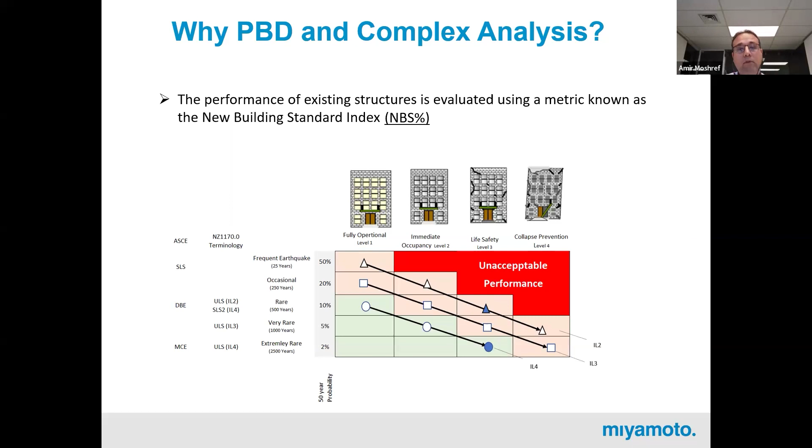The new building minimum code requirement in New Zealand is very similar to the US: life safety for DBE level, and to some extent collapse prevention for MCE level. So when we say a building is 100% NBS, it means we can satisfy life safety for DBE level. But what is unique in New Zealand is that we actually use NBS in advertising our structures, and the public is very familiar with NBS.

But there is a similarity between New Zealand and other locations like the US: when we want to change building use, we need to upgrade our existing structure. It's compulsory, and we need to upgrade it as closely as practical to 100% NBS. In ASCE terminology, we need to satisfy the basic performance objective for new buildings, or come as close as possible. This is very important, especially after COVID, as most office buildings want to convert to residential, meaning we need to do strengthening on those buildings, and providing a cost-effective solution for strengthening is very important.

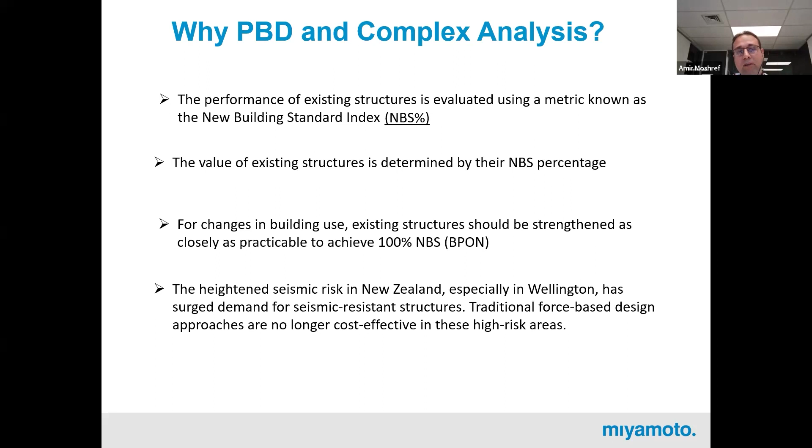But the other driver in the market is new design. If you're not aware, in New Zealand we recently reviewed our national seismic hazard, and as a result we found that the previous hazard level in some locations was very underestimated.

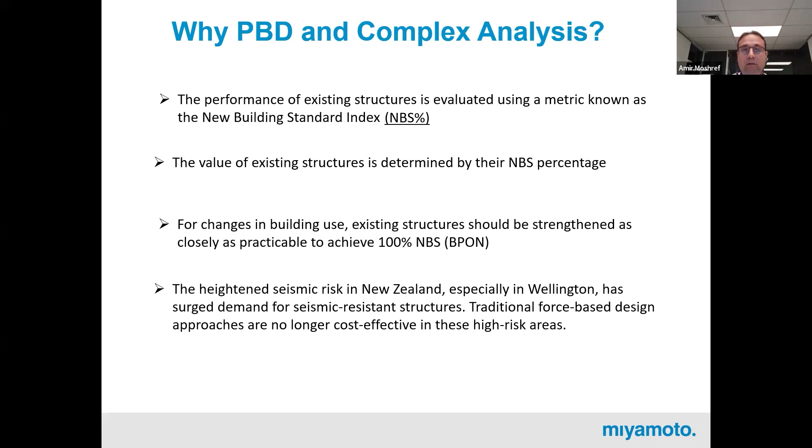That's the other driver in the market, because if you want to design a building based on the traditional method using shear wall or moment resisting frame for this high level demand, it's not economically viable. As a result, you either need to use technology like viscous damper, base isolation, or try to use performance-based design to understand what's actually happening in the building and try to optimize your design.

But do we actually have evidence for this kind of theory?

So we can see that, or we can easily correlate our revenue to promoting performance-based design into the market. What's happening here is essentially that you guys are providing something completely different from any other people in Wellington or anywhere. That's actually the whole key of this talk.

So with this kind of introduction, let's go to some case studies. The first building that I want to share with you is located in the center of Wellington. It was built in 1964-65. It's a 26-story building with a 68-meter height. This building has a 7-story podium, 16-story tower, and a 3-story penthouse on top.

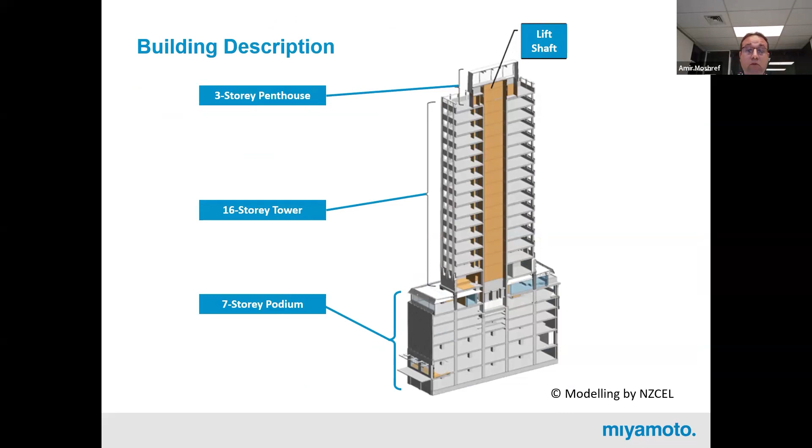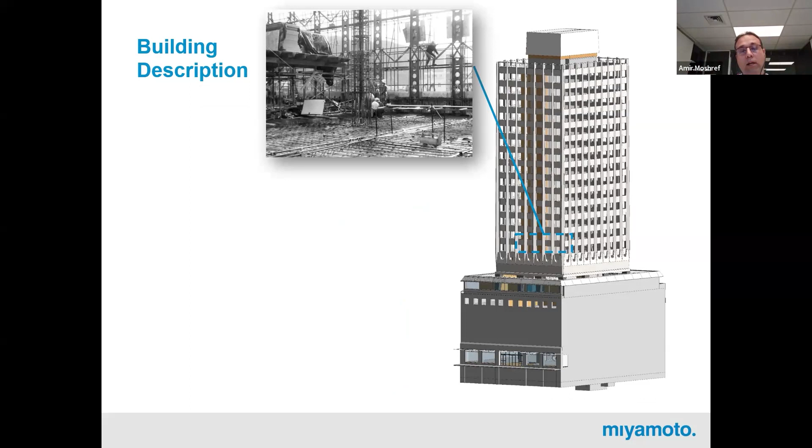But what is unique about this building is the structural type. The original designer actually designed the building using composite components, meaning concrete encased steel lattice structure, or concrete encased steel profile. In the tower, the lateral resisting system uses those kinds of small columns with beams, so it works like a tube system for the tower.

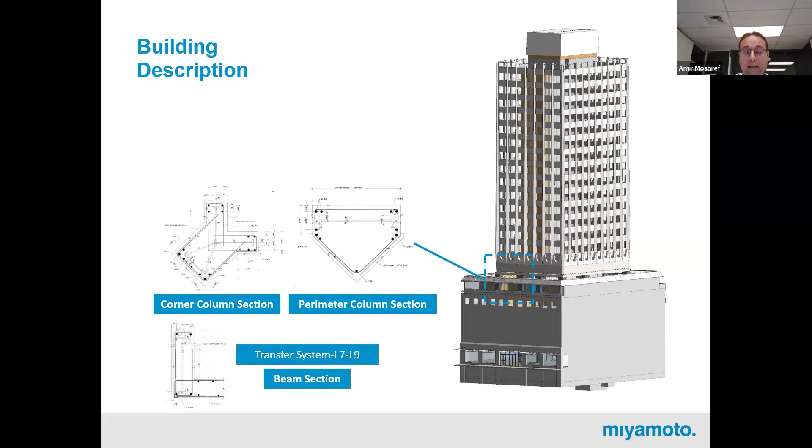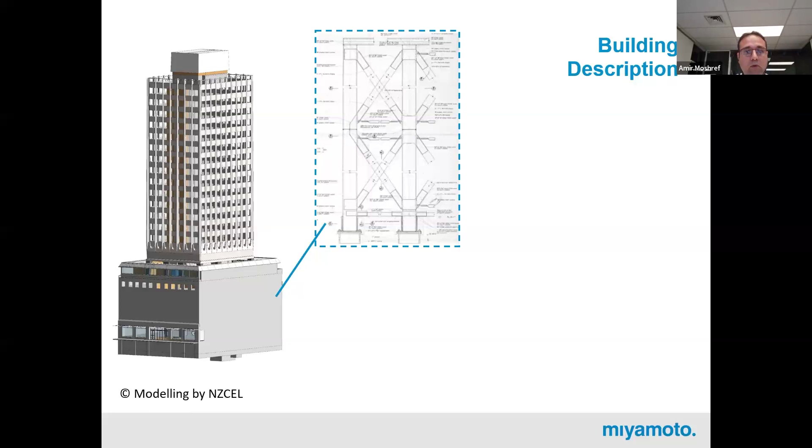Then the tower is supported by 16 columns between the tower and podium, and the load is transferred using a 2-meter deep beam at that transition level. Again, all the columns are concrete encased lattice structure. In the podium, we also have like a core, a shear wall, or we can call it a retaining wall as well, which is concrete encased steel structure.

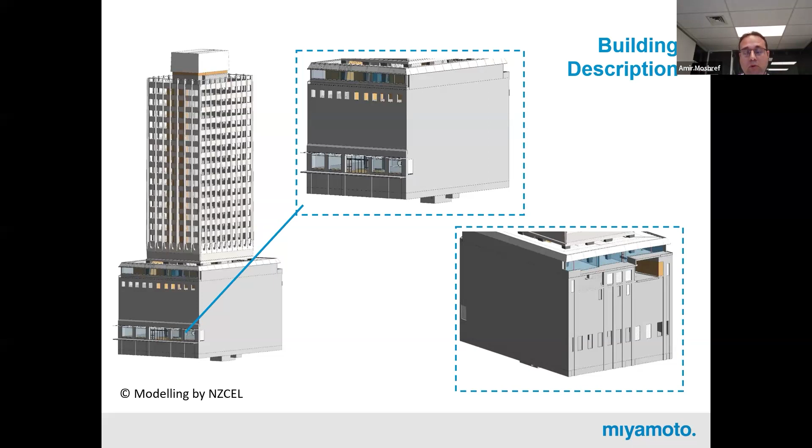Because the building is actually located between two streets with different elevations, the designer provided an opening to access retail, but to make it symmetrical, a similar kind of opening was provided at the back of the building, as you can see here, which is just facing the dirt. So the main intention was to balance the stiffness to prevent torsional effect in the building.

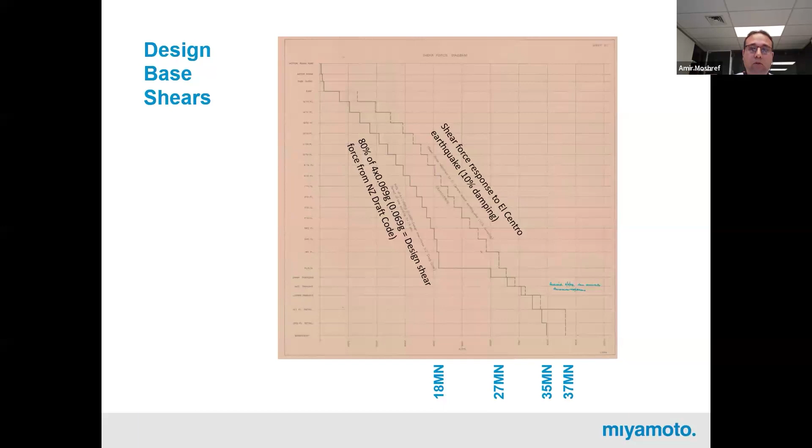More interestingly, back in 1960, they actually did a time history analysis on this building using El Centro, and they allowed for 10% damping. That 10% damping, I think, was because of assuming some kind of ductility capacity in the system. Actually, in the recorded calculation, they said they used a ductility of 2 for beams, for example, which was very interesting to me.

If you want to assess this kind of building or any type of existing building, normally we use a guideline. In New Zealand, we have the NZSEE guideline, similar to ASCE 41 in the US. That guideline normally gives us the capacity or behavior of the component - a beam, reinforced beam or column. Based on the reinforcement and detailing, it gives you the backbone curve of those components. We get that component level from the code and assign it to our ETABS model or numerical modeling to find out the behavior of the system.

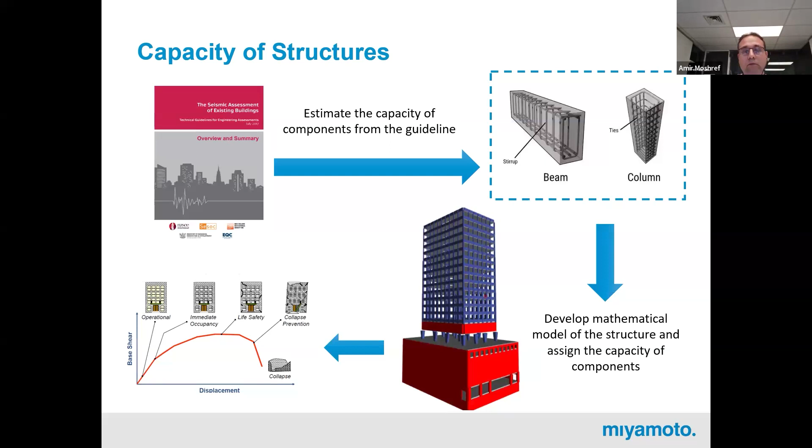But what happened in this building is that we got stuck at the first step, because there is no guideline or code about the performance of these types of components. We don't have that kind of concrete encased lattice structure in the guideline.

So the first approach I took in my previous company was a little bit conservative. Let's say we don't have ductility on the system and just make it work as elastic. So what I proposed was to do base isolation in the mid-height, between the top of the podium and the tower. When we developed that solution, we had a big challenge.

For this kind of base isolation system, you need to provide a rattle space around the building. When we have a tower, it's easy because the footprint of the podium is bigger than the tower, so you can easily provide that rattle space. But with regards to the internal lift, providing rattle space around the lift means we need to reduce the number of lifts from 3 to 2, which wasn't good for converting that building to residential use. The city council actually asked for at least 3 lifts, meaning we should have added another lift and stair from outside the building.

Lifts are elevators for people in the US, just to let you know. Oh yeah, sorry.

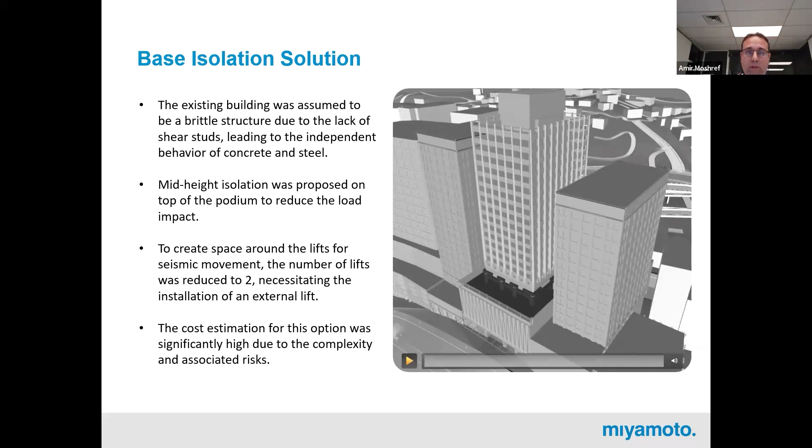When the new owner took the building, they came back to us and said, okay, we don't want a Rolls-Royce option, can you propose something that is economically viable? Then we went back to the first step. We said, okay, there was a big assumption at the first step that the building cannot have any nonlinearity and should stay elastic - can we actually challenge that assumption?

We tried to find any code or technical literature about the performance of these types of components. There are codes and guidelines for composite components in New Zealand, similar to AISC, but most of these studies are about the performance of rectangular or circular concrete encased columns with a steel profile. Normally they don't talk about concrete encased steel lattice structures, and they require good shear transfer between concrete and steel to ensure composite action, which we definitely don't have here.

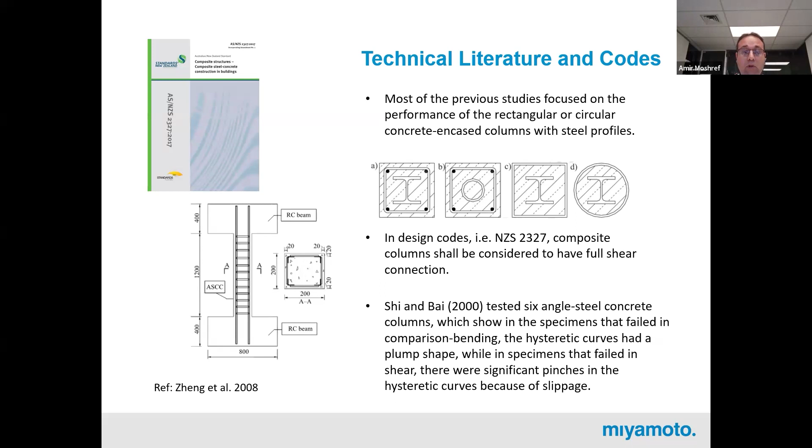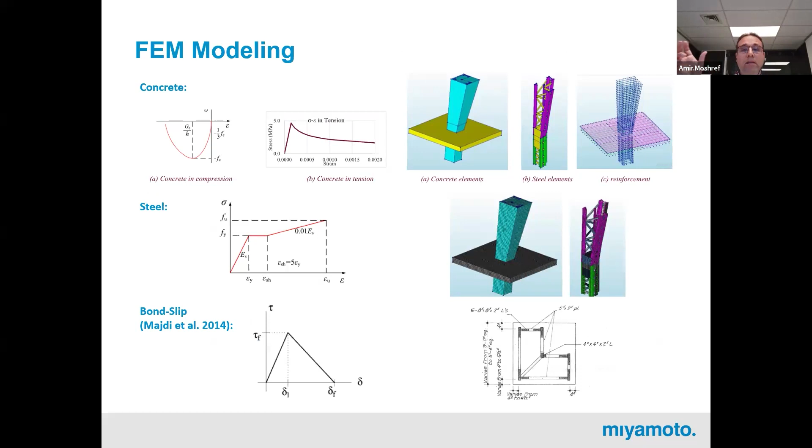There are some studies about this type of component, like concrete encased steel lattice structure, but the configuration is a little different from what we have in this building. So with this evidence, we said okay, let's do some finite element modeling. We jumped to Abaqus and Diana to develop finite element models for the critical components - the column between the tower and podium, as well as the beam-column joint. I don't want to go into that technical detail, but if necessary I can answer questions at the end.

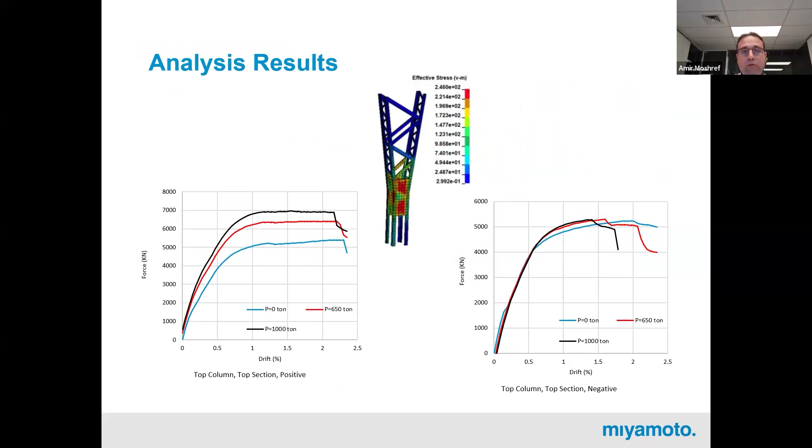When we developed that finite element model, we found the performance of the component is not too bad. It seems the column is able to take up to 2% drift, and similarly for the beam-column joint, we found potentially 2.5% drift they can take for that kind of deformation. But as most of you know, with this kind of numerical modeling you always need good backup, because bullshit in, bullshit out. Without good evidence, we cannot use that for this building. With this numerical analysis, we had confidence that with 70% chance, if we did the test, we would be able to prove that the building is ductile or has some level of ductility.

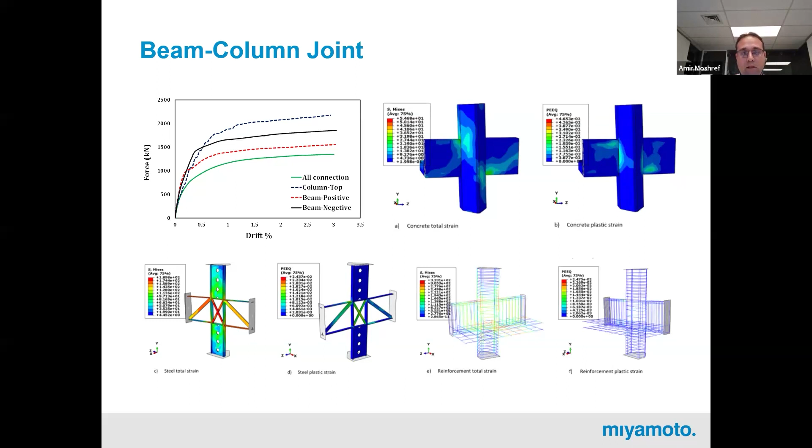So we went back to the client and said, look, if you spend some money on testing, we are confident enough that you can get a better result and we can reduce the scope of work significantly. So they believed us and they paid for the test.

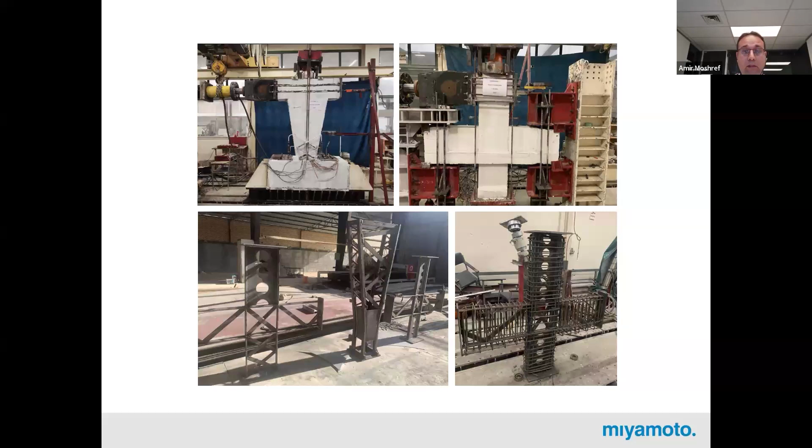So we did tests for a sample of 2 beam column joints at 2 different levels, and also 2 columns between the tower and the podium, one at the perimeter and one at the corner. The test was a cyclic test. That's just a sample of the results for the perimeter column and the corner column between the podium and tower.

As you can see, first of all, the hysteresis curves are very stable, so it's a good hysteresis curve. And we haven't seen any strength deterioration up to 2 to 2.5% drift, which was more or less similar to what we forecasted from our numerical modeling.

So there's a big gain for us, because now we can actually have some level of ductility in the system. Even if we have a ductility of 2 in our system, we can reduce the demand by 2. So we halve the demand. That would improve the performance a lot.

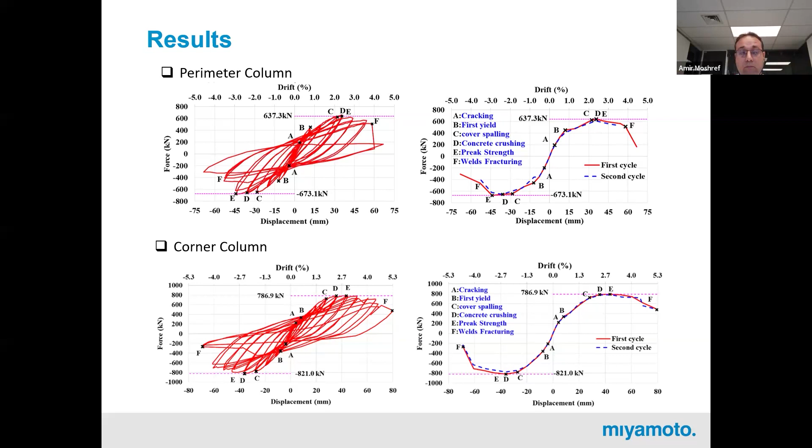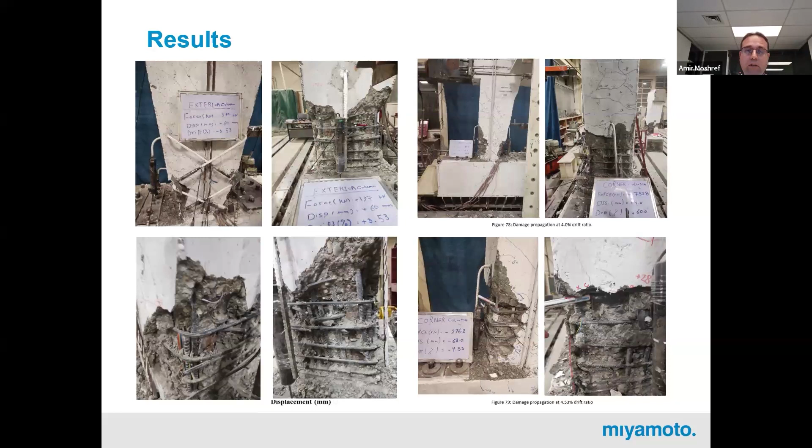That's a photo at the end of the test. The performance of those columns was actually governed by the weld of those lattice structures. But as you can see, the crack happened along the height of the column, which demonstrates why we have that kind of ductility in the system.

Using this evidence along with numerical analysis as support, we were actually able to change the scope of work from mid-height base isolation to steel jacketing the column between level 6 and 8, so just 2-story steel jacketing, and putting in viscous dampers. So we put 4 viscous dampers on either side of the building, only on that level.

The tower was fine, the podium was fine. It was more about the transition from the tower to the podium.

So in terms of cost saving for the client, the cost for the mid-height base isolation was roughly about $20 million US, which dropped to about $5 million US. So it's a big save for the client.

Having said that, it's not just about saving money for the client. Imagine if we just stuck with that mid-height base isolation, nothing would happen to this building. So the risk would be for the public, whereas now, by reducing the cost, the client goes ahead with the strengthening, and we also reduce the risk to the public.

I think the interesting part of it is using Abaqus modeling, the finite element analysis, or doing actual testing—those things have been done in California, anywhere, for the past 50 years, right? And to really understand the whole concept becomes a research thing. It takes 2, 3, 4 years to do things like this, almost like part of a PhD thesis.

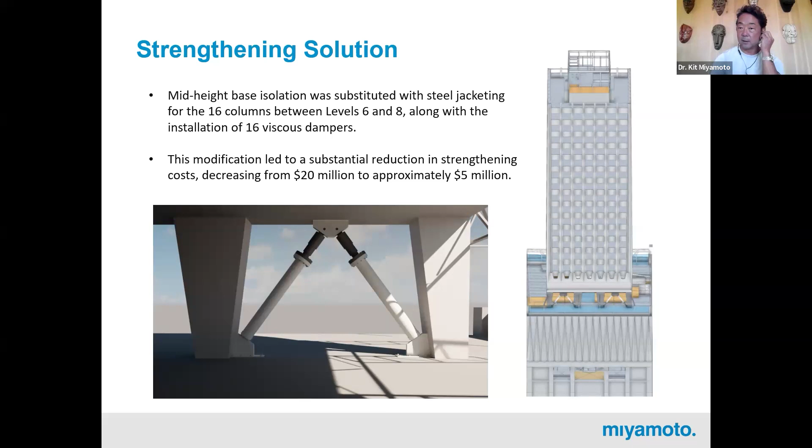Okay, let's keep going to the second example. So the second example is a heritage building, again in Wellington, built in 1935, so it's quite an old building, 100 years old. It's a 7-story building.

The lateral resisting system is moment resisting frame at the perimeter, and also inside, so 3D moment resisting frame. If you look at the detailing that the designer provided, it's not very bad detailing. The beams and columns have reasonable detailing. The main issue is the beam column joint.

There is no stirrup in the beam column joint. And also, because back in 1935 they used allowable stress design for this building, the size of the elements are quite chunky. They are quite big.

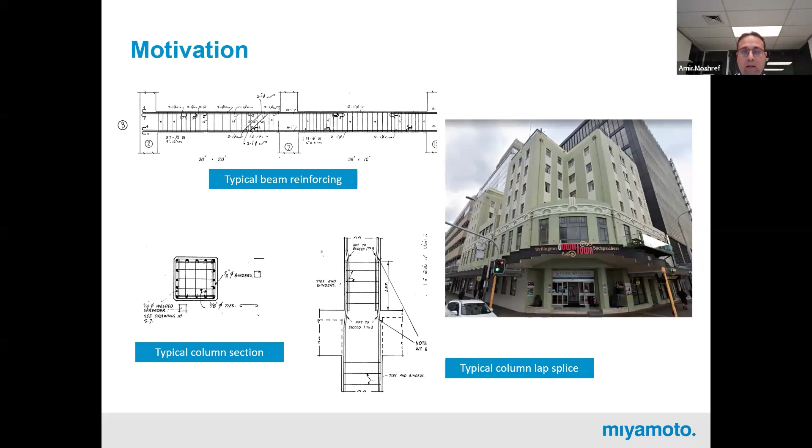When we assess the building using ASCE 41 and also the New Zealand code, in ASCE 41 we don't have that kind of recommendation for this kind of beam column joint when you have reinforcement hooked into the beam column joint or hooked out. But in New Zealand, we do have that recommendation, from tests done in 2002 and 2005 at the University of Canterbury by Stefano Pampanin.

Based on that test, what they observed was that these, especially round bars, would slip into the joint when you have a bending moment of the beam, which results in this kind of wedge failure. And that's very non-ductile behavior.

As a result, they said that if you don't have ductility in the system, you have some level of strength in the beam column joint, but once ductility happens, you start seeing cracking, and that capacity reduces significantly. In our case, we are on case 3, so even at the start it's quite small, but by a curvature ductility of 3, which is a displacement ductility of roughly 1.25, you almost reach to 0.

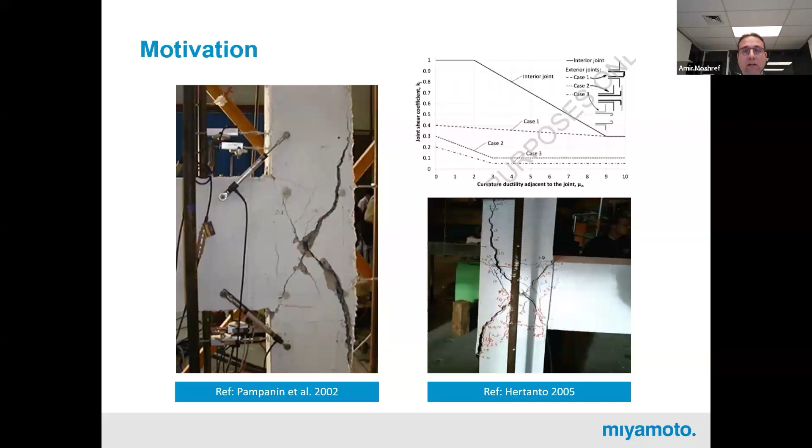So that's a big issue for beam column joints, and you know that we have beam column joints everywhere. So strengthening those is quite a big mission.

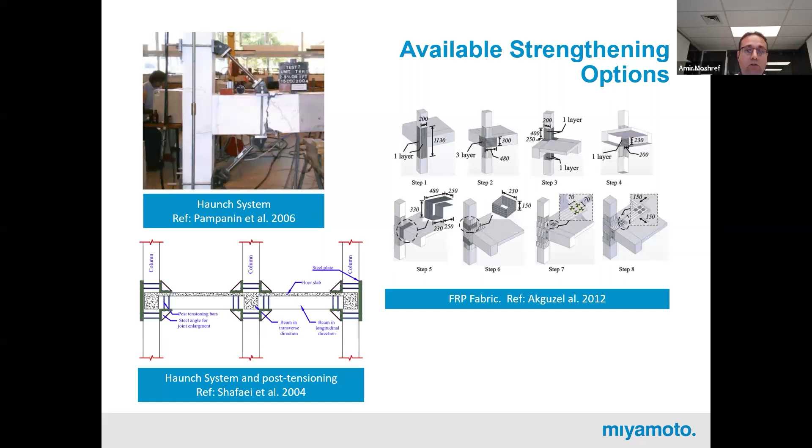If you look at what's available in terms of solutions for strengthening, either people propose to put some haunch at that beam column joint with the intention to transfer the plastic hinge away from the joint, or provide a secondary load path, make it a bit bigger, or do this kind of FRP around the column, FRP around the beam, trying to transfer the load or increase the capacity by the tensile capacity of the FRP.

But can we actually use that for this building? First of all, we are dealing with a heritage building. I don't know about the heritage rules in the US, but it's very demanding in New Zealand, so we cannot touch the outside of the building. It's very limited. It's the same here, very similar.

So if you cannot touch that easily, then the haunch option or even the FRP option is not a real option anymore. Also, if you assume we put a haunch at the interior column, that means you transfer the plastic hinge, making your beam shorter. Now you're dealing with a shear critical beam instead of a flexure dominated beam. So yes, you solve the issue for the beam column joint, but you transfer it to the beam or to the column. It's quite tricky.

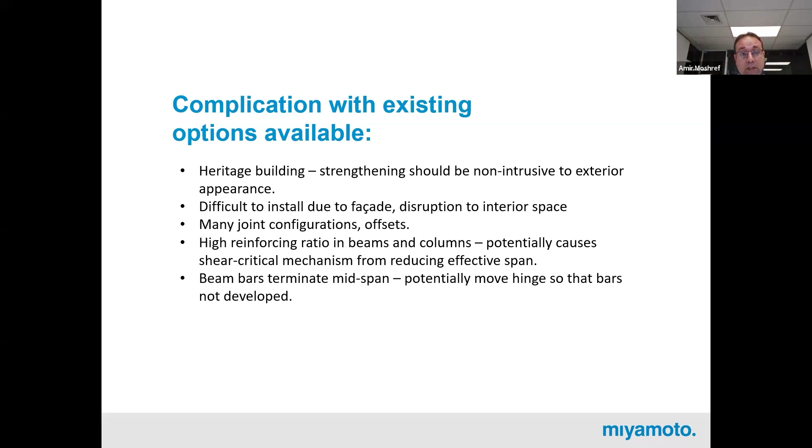Again, we started to say, okay, we need some numerical analysis to understand the performance of this type of joint, and whether there's any way we can strengthen this beam column joint suitable for this building. So we jumped into Abaqus and developed the finite element model, did some monotonic and cyclic tests, and found that these beam column joints are not that bad—about 1% to 1.5% drift capacity.

But now you're going against the guideline, against the code, so you need very good evidence for why you're doing that. It's not easy to just say, okay, I did that numerical analysis, I disagree with the code. So you need to back it up with a test.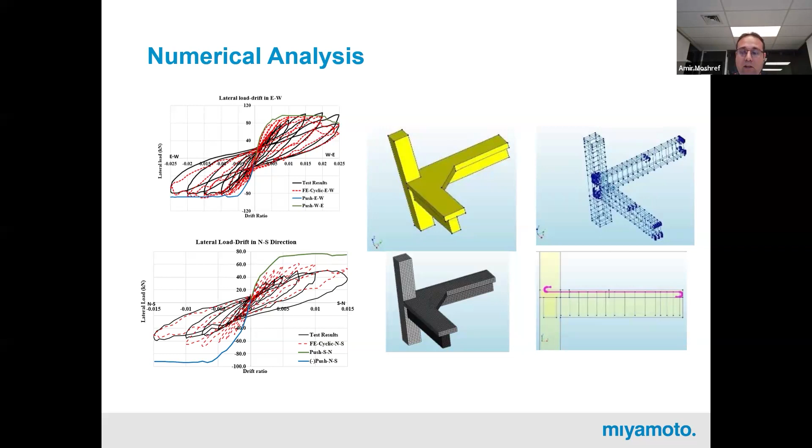We pushed for the client to do the test. It's a full scale test and a bidirectional test. One of the reasons we went to the full scale test was that when we looked at the backup for what's in the guideline, we found that most of those tests were based on the typical detail in Europe, which has a smaller column.

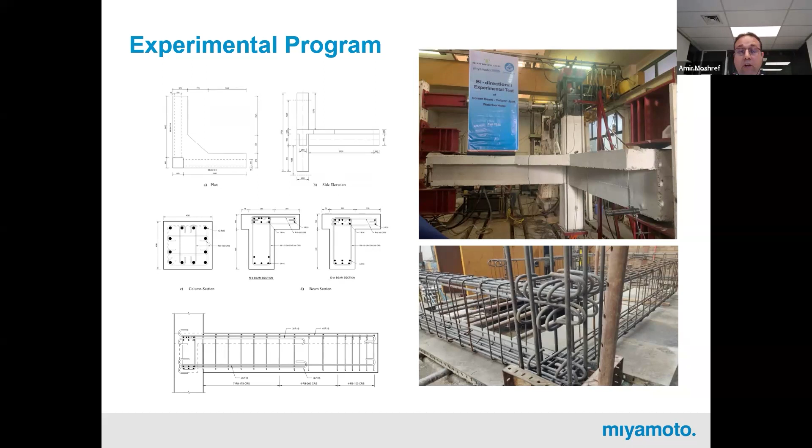The development length of the bar into the column was quite small in the previous study, whereas for us, because they used allowable stress design and American code back then, the size of the column and beam is quite big. So potentially the performance could be different and could actually be a function of the scale. We decided to go for full scale testing.

That's the test setup and how we applied the loading protocol to this bidirectional test. That's quite a big mission for bidirectional testing, especially with the loading protocol. It took us about 2 days to complete just one test after setup.

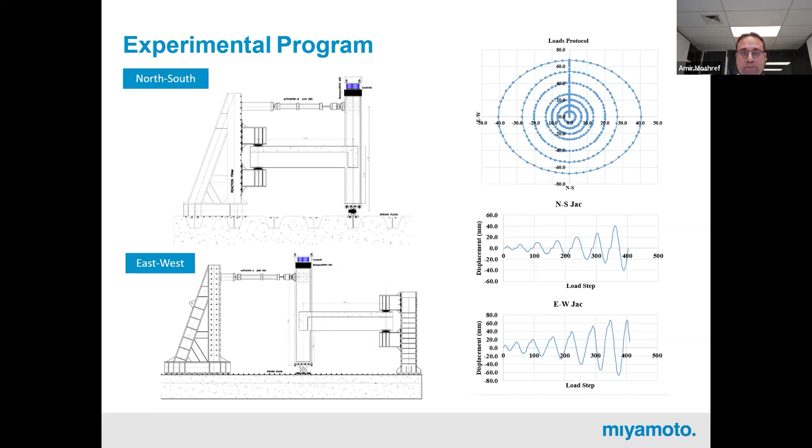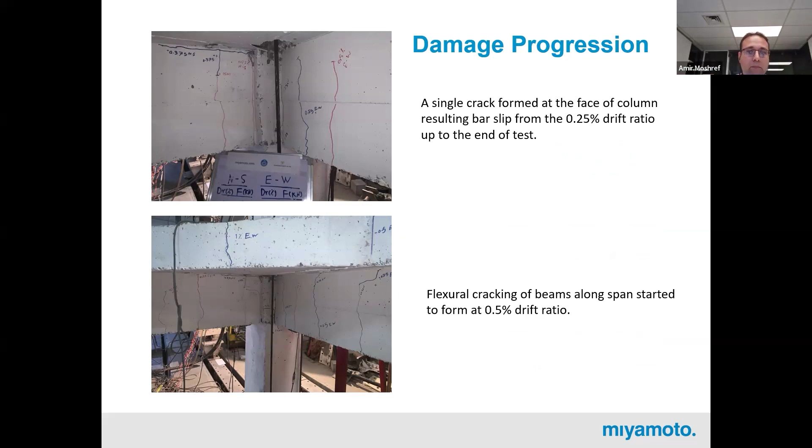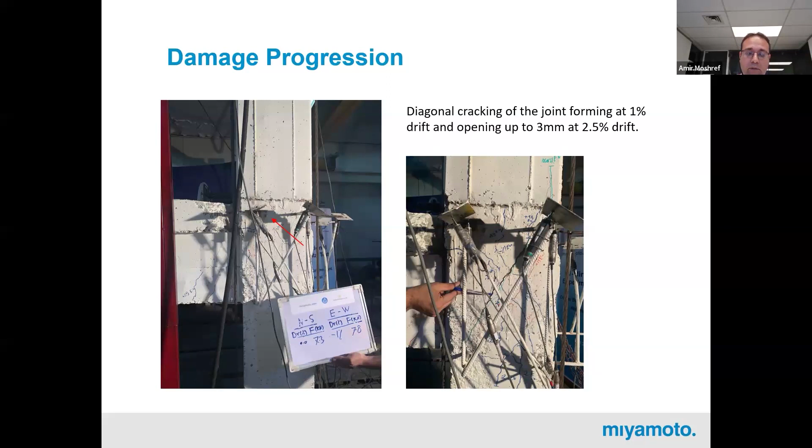But what we found from the test is that the crack happened in the beams, which means there is some ductility in the system. Before anything happened to the joint, the beam started to crack. The joint started to crack around 1% drift, and at around 2.5% drift, the crack you can see in the photo opened to about 3 millimeters. So that was the failure of the joint.

When we look at that hysteresis, we find that up to 2% there is capacity in the system and the joint, and after that we see this kind of strength dropping and degradation. Looking at the strength side, if we use the 0.2 that the code recommends, we get very good accuracy for estimating the capacity of the joint. The code says that after having a ductility of 1.25, that 0.2 needs to go down to 0.05, reduced by 4 times, but we didn't see that kind of behavior in our test.

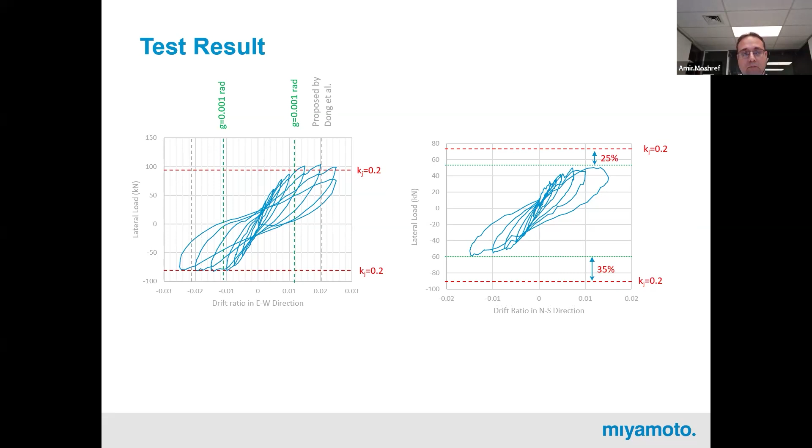But more importantly is the deformation capacity. This green line is the limit of the guideline in terms of deformation capacity of this kind of beam column joint. This is based on one of the most recent studies that said the capacity is actually higher, which is more or less similar to what we found in our test. In the other direction, we didn't even reach the capacity of the joint, it was 25 to 35% margin to the capacity. So then we looked at why it's different.

One of the main reasons was that in the previous study, the size of the column was quite small compared to the size we have in this building. The development length in their study was only 18 times the diameter of the bar, whereas in our case it was 22 times the diameter of the bar, which can play a crucial role. Also, in their test all of the bar hooked into the beam column joint, whereas in our building and test, half of the bars hooked in and half hooked out, so it distributed the load. As a result, we had some ductility in the system.

In the previous study, there wasn't any crack in the beam and everything concentrated in the beam column joint, whereas for us it was different. We observed cracks on the beam, and we also didn't observe this kind of wedge failure.

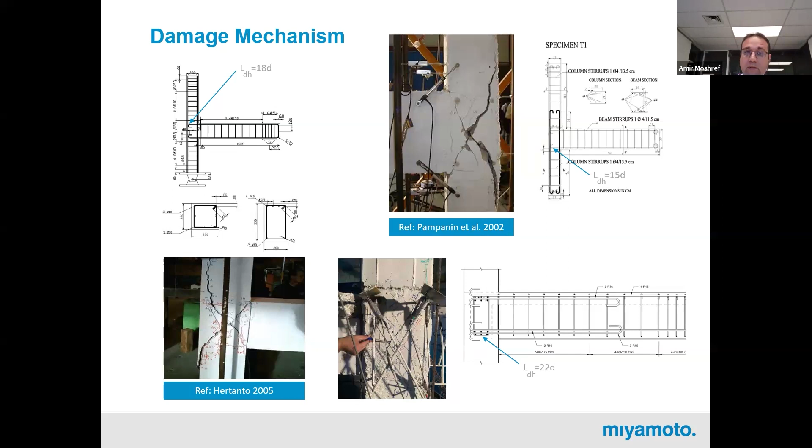But we thought, is there any way we can improve this beam column joint in an easy way, not using FRP or haunch? We thought, what if we stitch or reinforce the beam column joint with some tiny bars? So from outside, where we easily have access, drill 8mm or 10mm holes, then put 8mm bar into the joint, both diagonal bar and horizontal bar. This horizontal bar, because it's outside the building, you can bend it and weld it afterward, providing good restraint for the vertical reinforcement of the column to prevent buckling if you have damage in the beam column joint.

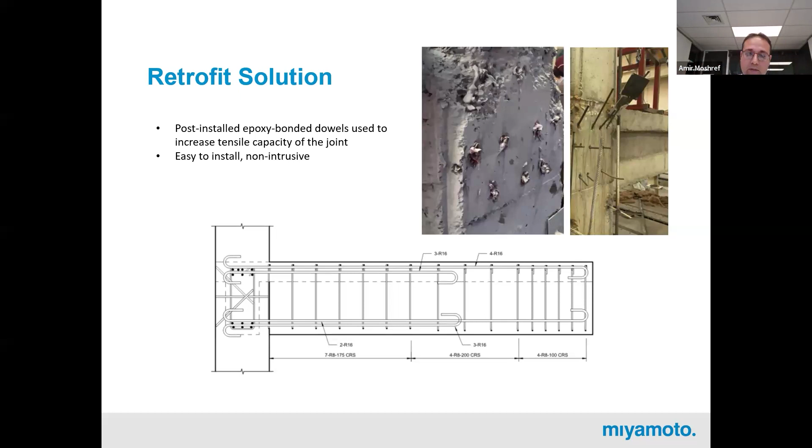So we thought that could be an option for strengthening, but again, we needed to prove that it works. So we pushed the button again to do another test with this kind of solution. As you can see, the crack on the beam distributed a lot more than what was in the main reference test.

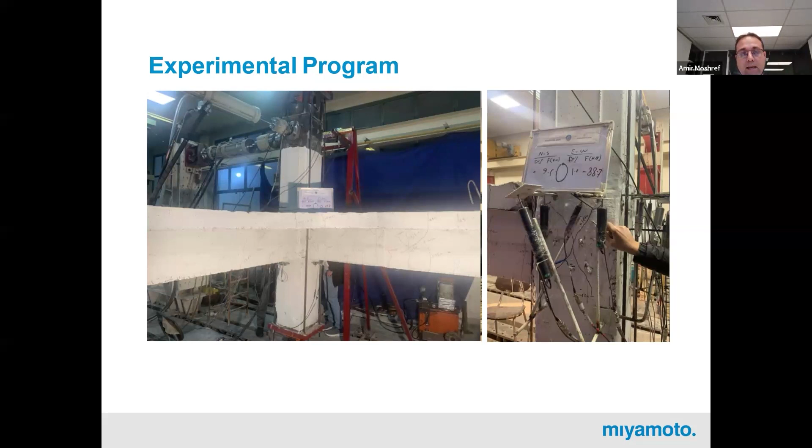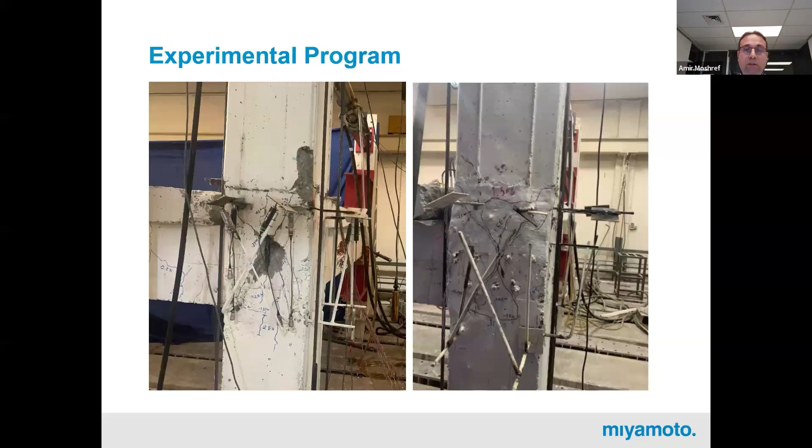And the crack again formed in the beam column joint, but it was stable up to about 3.2% drift. Even at that 3.2% drift, we stopped the whole test because there was some issue with the test setup. We were worried it could be dangerous to progress that test.

But even up to that level, if you compare the test result for the strengthening option with the reference option, you can see the deformation capacity goes up to 3.2%. Having said that, we stopped at that level. We haven't seen any strength degradation up to 3.2% drift.

In terms of the beam in the other direction, it performed more or less similar to the main direction. It didn't reach its capacity, so no nonlinearity happened in the other direction.

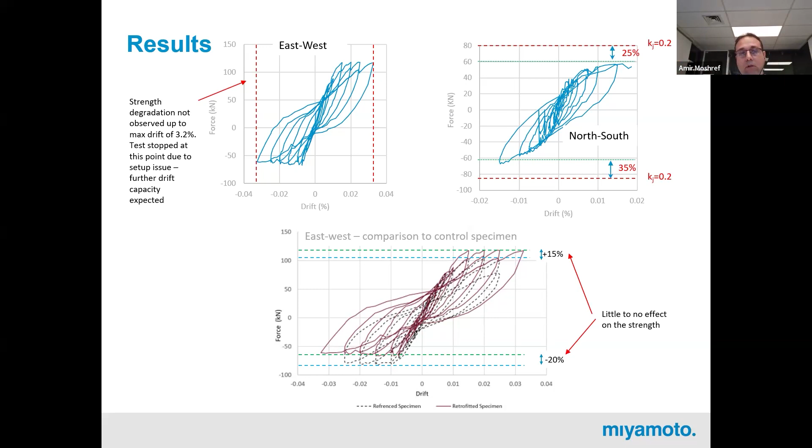In terms of strength, we didn't expect this kind of simple solution would increase the strength of the whole specimen, and that's what the test shows us. You have 15% higher in one direction, but 20% lower in the other direction. That could be uncertainty in the test or differences in the test setup, so that's not meaningful. It means the strength side is more or less similar, but what we gain is more about the deformation capacity.

The deformation capacity on the reference test was about 2.5%. We easily go to about 3.2 or 3.5%. So that means about 30 to 50% increase in the deformation capacity.

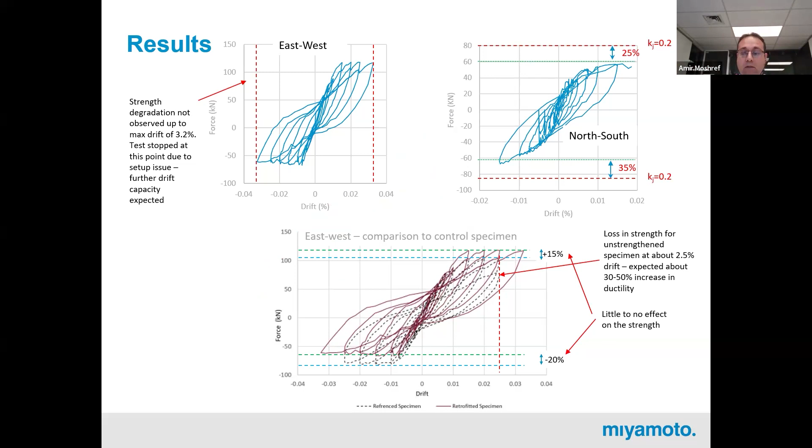With this kind of testing and this kind of solution, we were able to reduce the strengthening cost to just 500K. Imagine if we hadn't done that - our option was to put a viscous damper or a shear wall in this building to limit the drift to less than 0.6%, to be sure the building would perform elastically and nothing would happen in the beam column joint, providing a secondary load path.

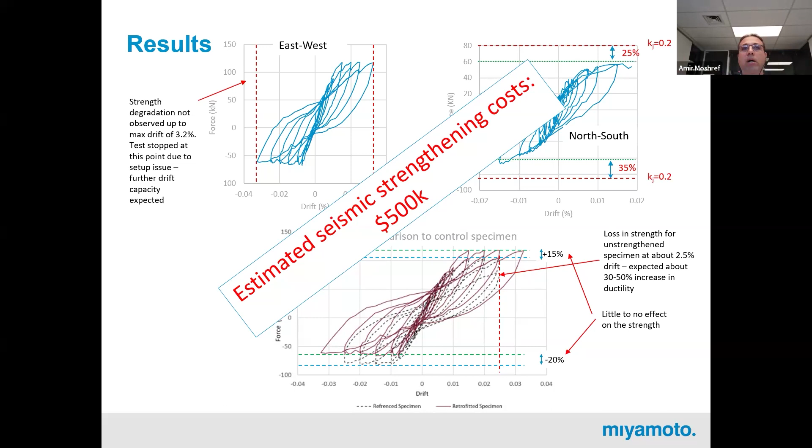But that's very significant work because you need to put a foundation in that building, and the soil wasn't great. So we're talking about something more than 10 to 20 million in strengthening costs going down to only 500K. That's what we added to this project.

Now going to the other part of our work, which is soil structure interaction. As you know, for soil structure interaction we always have two options. One is the substructural option - there's a guideline, ASCE gives us some information about how we do that.

You can model your structure in ETABS and then model the soil using dashpots or springs. Or you can jump to direct analysis, in which case you need to model the soil as a continuum space with a boundary condition, model the structure on top, and see what happens.

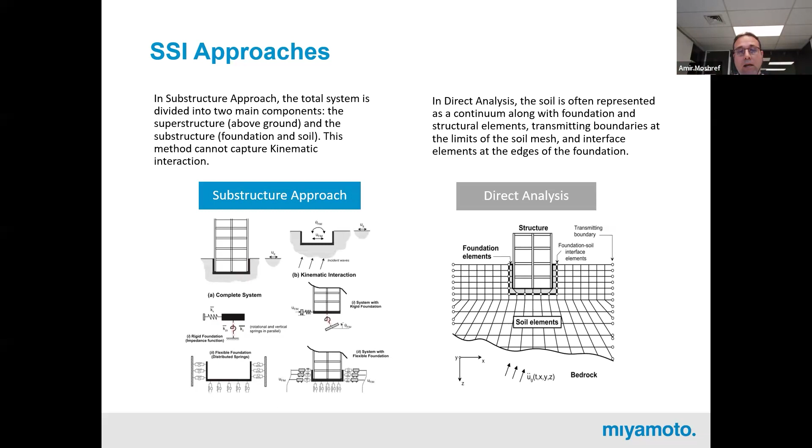For both options there are pros and cons. For the substructure approach, it's relatively easy, but the characteristics of those springs and dashpots can be a function of different parameters, can be a function of the performance of the superstructure, and it's trial and error - you go and change the spring, you get the pressure from the structure, and then you need to update the characteristics.

On the other hand, direct analysis is normally very time-consuming and expensive because you need to model the whole soil. So there is a negative for that option, but it can capture all of those interactions, and also the kinematic effect of soil structure interaction. So we thought, is there any way we can solve those two main issues with direct analysis - the time and cost of using them? Which we actually did solve.

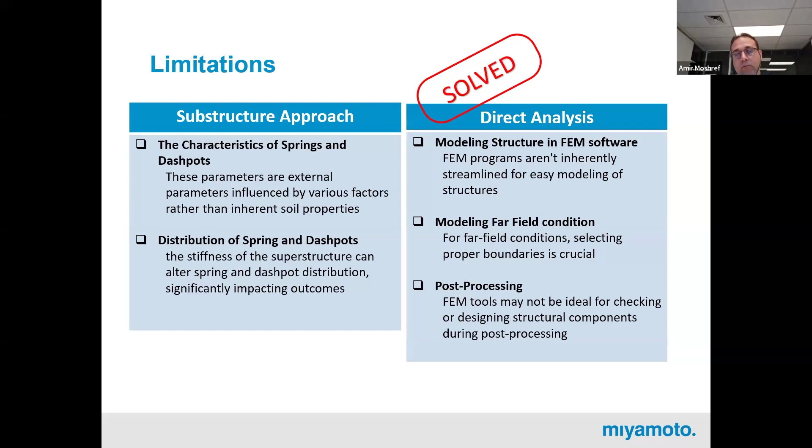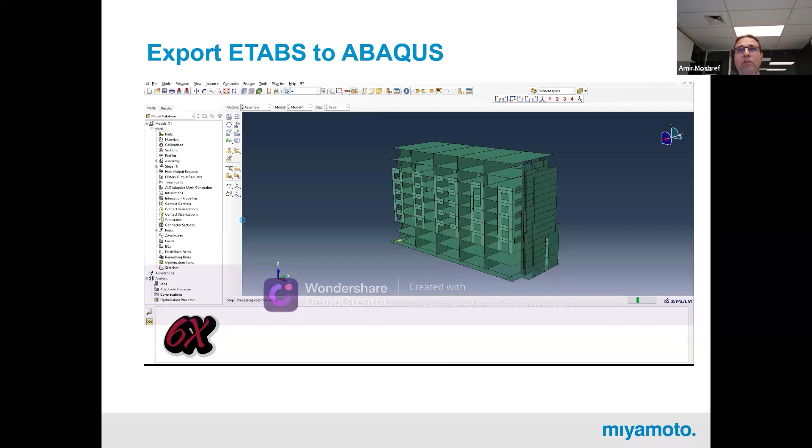One of my colleagues developed a macro that can transfer or export information from ETABS to Abaqus, and that's very critical for us. The video you're now looking at is the process where our model is automatically converted from ETABS to Abaqus. The time of converting this 9 story model is exactly as you're watching - less than, I'd say, 2 minutes. You can transfer everything from ETABS to Abaqus. That's a very big gain for us because we solved that time and cost issue at this stage.

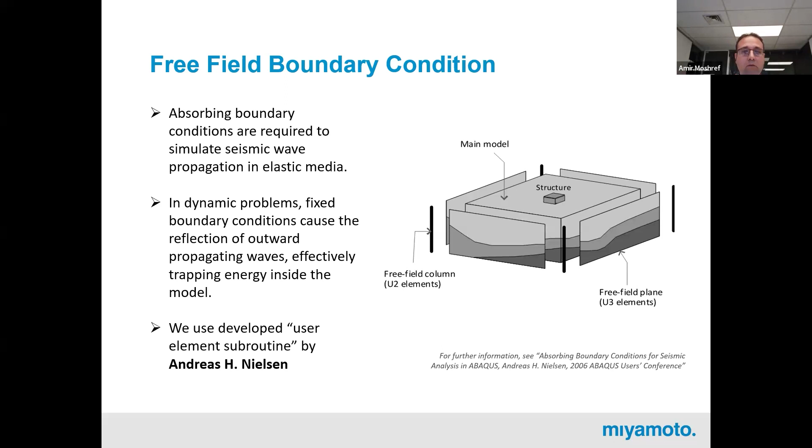The other issue with direct analysis was the boundary condition, because you don't want a very big model - you want to minimize your model in those direct analyses to be sure the running time is manageable. So my colleague brought in some subroutines to Abaqus and developed those kinds of boundary conditions in Abaqus for our modeling.

So if we want to see what the analysis process is, we have a structure that we normally model in ETABS, and then we use the macro that was developed to export the ETABS model into Abaqus. Now is the time to verify both models. This time we cannot do the shaking table test, unfortunately, but at least we can verify one model with the other model.

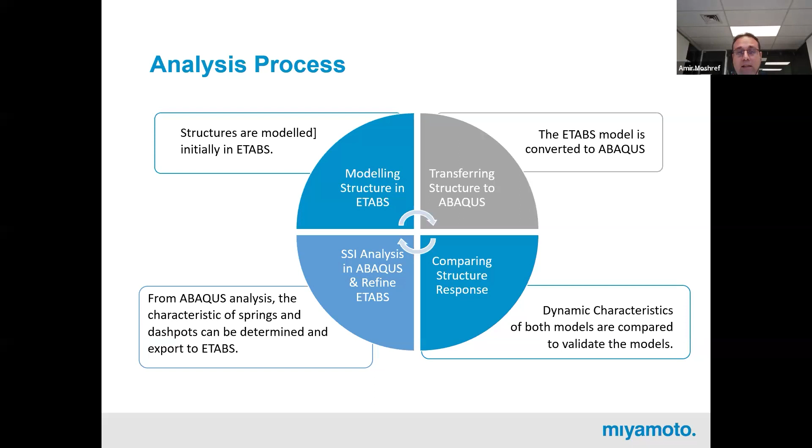So the dynamic characteristics of both models should be more or less the same and reasonable. The third step is to always check the dynamic characteristics - the period, the mode shape - should be more or less the same. Once we ensure the Abaqus model is correct, we push the button to run the analysis in Abaqus, and if required, after finishing the run, we can bring the result back into ETABS. So there's a good way of connecting Abaqus and ETABS, and both parties - the structural engineer and geotech engineer - can get advantage of that.

Have you used that for a building? Yes, this is a residential apartment in Wellington. There are two identical buildings, 9-story buildings, as you can see here. In terms of the geometry, the width of this building is 16 meters, the height is 26 meters, and it's founded on a shallow foundation. So a 9-story building, shallow foundation, with an aspect ratio of about 2, in Wellington, soil class D.

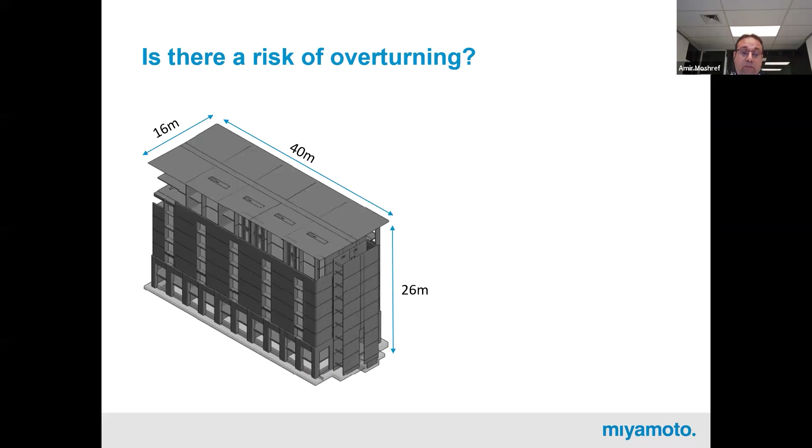The first thing everyone looks at is overturning, because it looks very bad for overturning. So when we did the nonlinear pushover analysis and the code-based approach, we find that the building would start to overturn, or rock, at about 40% NBS. So the building rocks, but is it the end of the world if the building rocks, or is there a way we can actually show that we can get advantage of rocking?

Rocking is not a bad mechanism if we can control it. So we said, okay, here the 40% NBS means 40% of the building code demand - in the NZ code, a certain demand of a structure - and it's only 40%. Before reaching 40% of it, it has an overturning. That's where that comes from. Thanks. Yep.

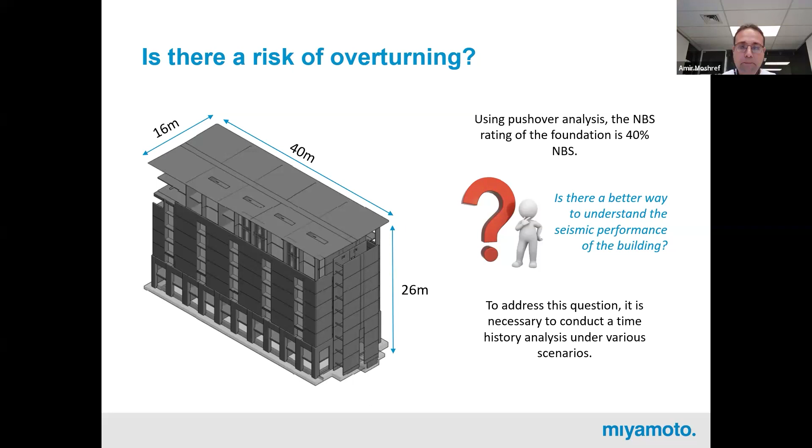So we jumped again into Abaqus using that macro, developed the modeling, and ran a time history analysis. You can see there's a sample of time history for one record. If you look at this corner or this corner, either corner, you can see the building started to rock, but nothing happened to the main structure - it would not result in collapse. To have a good margin for collapse, we ran again for the MCE level, because you need a good margin before having collapse.

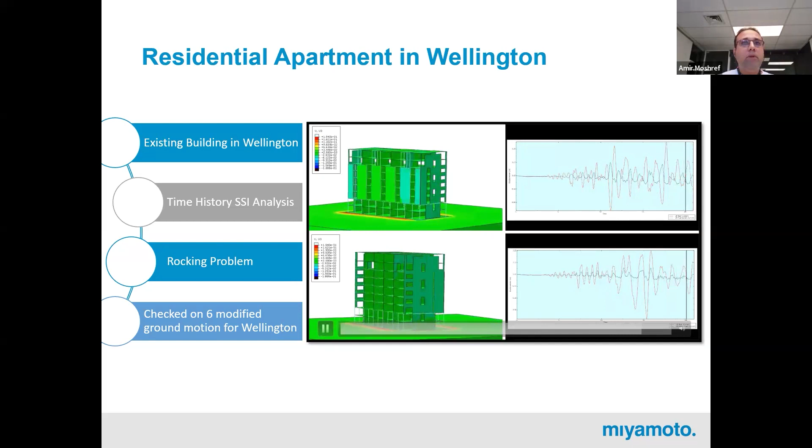The other thing we observed in this model was that the ground under the building started to plastify, which actually gives us a source of additional damping to the system, which normally we are not considering in our analysis.

So what we actually added value to the project - our first option was to add micropiles to prevent rocking. But around these two buildings at the back, there are new buildings that give us no access to the back of the building to install those micropiles from outside, meaning we'd need to install them from inside. As a result, it's a very costly exercise because of making good costs, and also very disruptive for the residents - we're talking about a residential apartment, and it's not easy to move everyone out while doing that kind of job.

But the other interesting thing was that when you actually put piles in this building, you fix the foundation and prevent the rocking, but you move the issue to the superstructure - now you need to do something on the superstructure as well. Whereas if you let the building rock, the demand on the superstructure would be a lot less and it's manageable. So again, by doing this kind of work, numerical analysis, and performance-based design, we were able to reduce the strengthening costs significantly. I don't have a number to compare, but you can imagine it would be a very significant cost saving.

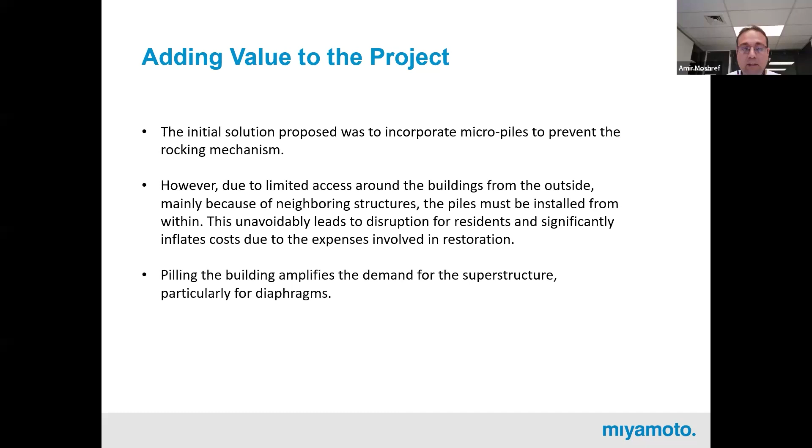The last example, I think I've talked about this building before, but it's worth raising again here. There's a 14-story building in Wellington Center, 58 meters, built in 1985, designed by Holmes. The lateral resisting system is a moment resisting frame at the perimeter of the building, and the flooring system is precast double T.

But what is unique with this building is that it's untopped precast double T. Back then, or even today, this is not in New Zealand code, but in ASCE there is some clause about untopped double T, though I don't think you'd use that in a high seismic zone. Potentially on the West Coast you're using that. To the best of my knowledge, this is one of the unique buildings in Wellington that doesn't have any topping to work as a diaphragm. So how does the diaphragm force transfer, when you have one double T and the next double T, they just join.

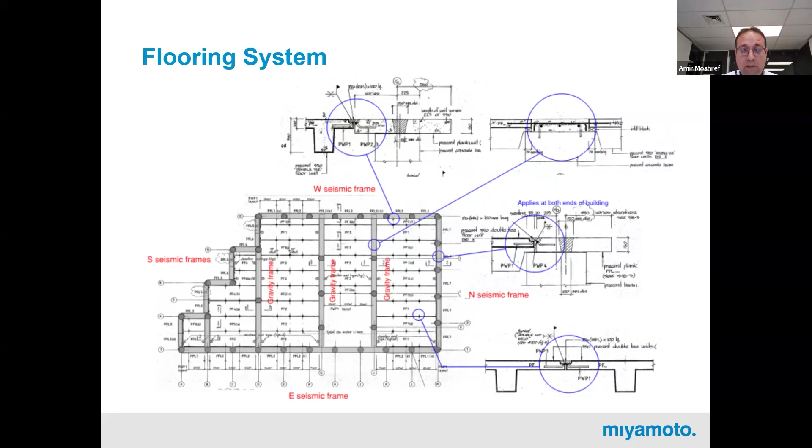This double T connects with this kind of connection - you can see this is the connection they used. They put some reinforcement at the edge of one double T and similar reinforcement at the other edge, then put a bar on the side and weld it. First of all, the welding quality, especially on site in New Zealand, is normally very poor. Secondly, you can see there's a lever arm between this weld and this bar, resulting in a bending moment on the weld, which is not great. So the weld is going to fail quickly.

Thirdly, what's actually on site is very different from what they designed. For example, they said we have this kind of bar, another bar in the next unit, and just one bar welded on top, whereas on site they found there's some gap between these two, so let's put a plate. Who knows how they actually welded that? And it's poor quality. So it's not a reliable connection. Definitely there is some capacity, but it's not a reliable connection on this one.

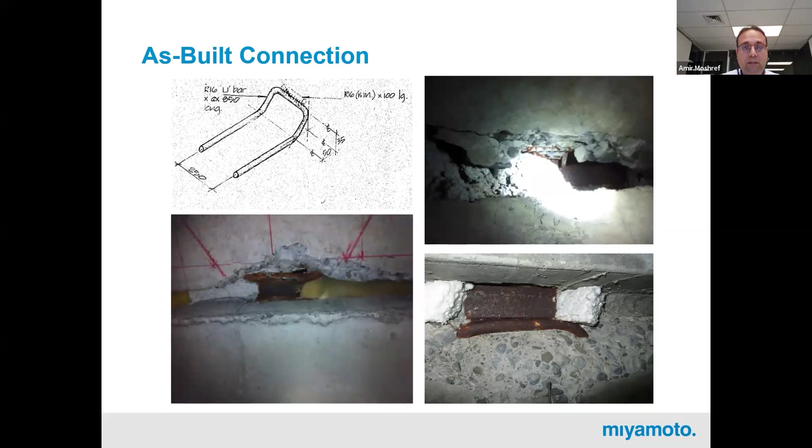Back in 2017, I guess, Beca developed a strengthening solution for this building for a previous owner. What was the solution? The diaphragm is an issue, let's put a new diaphragm. How are we going to do that? Put a steel plate all around the building on top of the diaphragm - a steel strap, steel plate, bolted to the concrete everywhere, with the intention of increasing the capacity of the diaphragm. Looking at that option, you can imagine that first of all, you need to strip out the whole building to do this.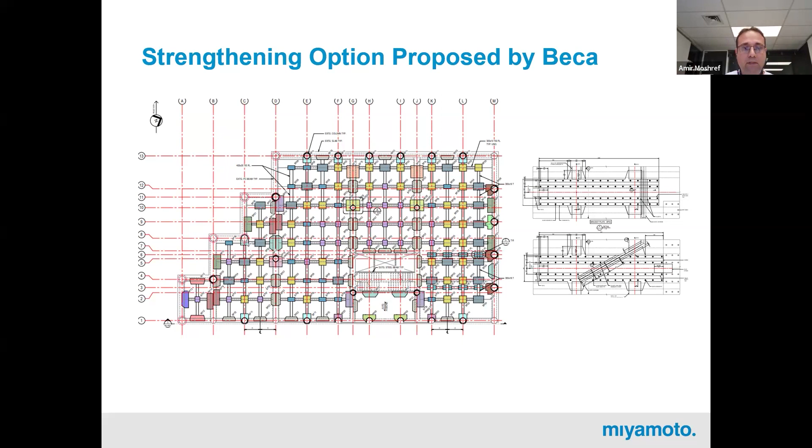Secondly, in this building the services actually run on top of the floor, and then there's a false floor on top. So for doing this kind of work, not only do you need to remove the false floor, but also remove the services to install this. The cost estimation for this solution back in 2017-18 was $20 million US. So the previous owner decided not to go ahead with this solution, and they just sold the building to the current owner. The current owner came to us and said, can you guys propose something better which works?

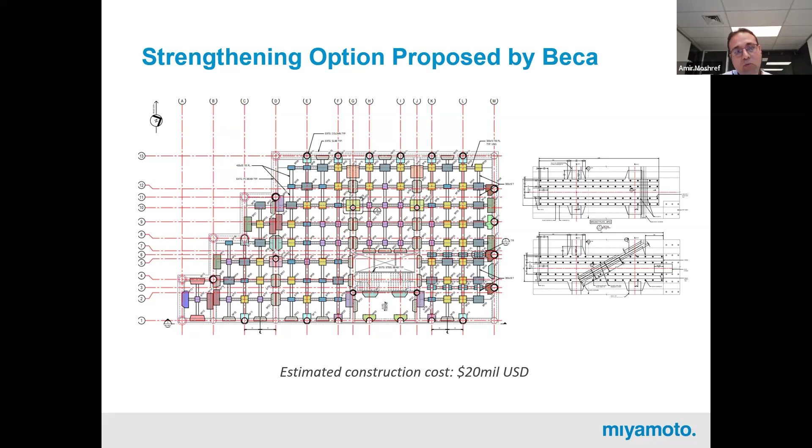I said, okay, we know that the diaphragm is weak, but in earthquake engineering it's always a question between demand and capacity. We cannot do that much on the capacity side. Let's look at the demand side - can we reduce the demand using some kind of viscous damper or technology? I actually looked at isolating the building as well, because there is a rattle space around the building, but that came out as an expensive solution. So we stuck with the viscous damper.

But the main challenge of a viscous damper in a concrete structure is how you're going to connect that to the existing structure, especially when you have a round column. It's not very easy - you cannot easily bolt through those columns. And also the performance of this kind of viscous damper is a function of the flexibility of your connection. If you have a more flexible connection, the load or displacement is not easily transferred to the viscous damper, so it would not do anything. You need to be sure that your connection is rigid enough to transfer the deformation to the viscous damper.

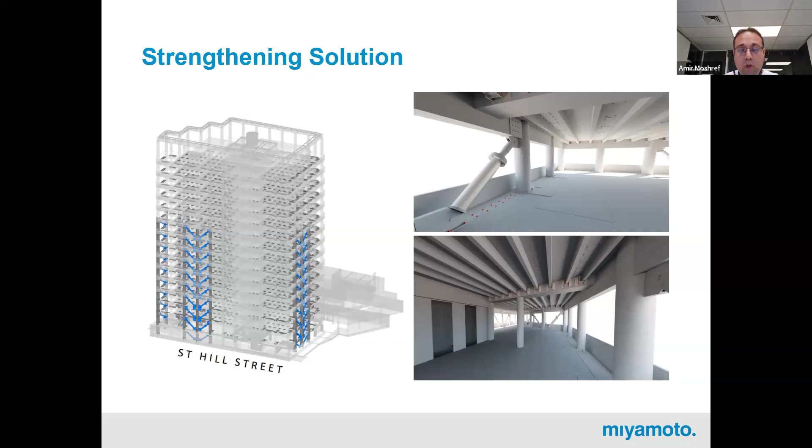How can we do that? The only way is doing numerical analysis again, but for the connection, to be sure that the connection has enough capacity, but also is stiff enough to transfer that to the column. So that's where the finite element model helped us with this building.

This building was reviewed by two different engineers, Arup in Sydney and in US, and Structex here down in Christchurch.

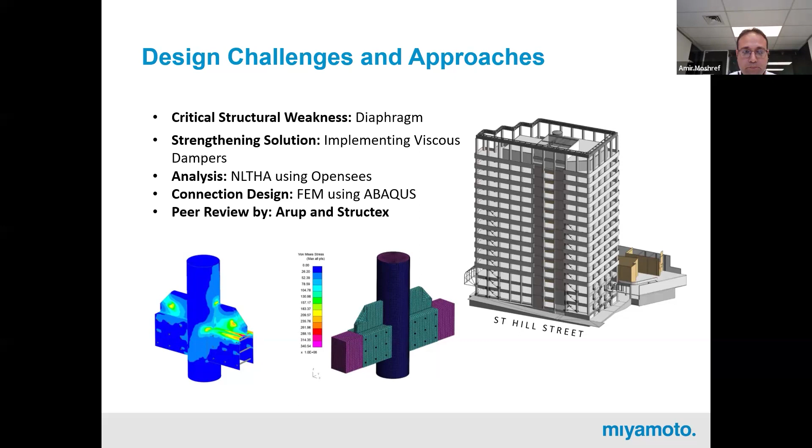So back in construction, the building is now in the construction. The construction cost from 20 mil reduced significantly to 7 mil. If you think about how we actually achieved that, in terms of cost for the client there was some cost for performing nonlinear time history analysis, some cost for finite element modeling and drafting and so on, but it's nothing comparable with saving about 13 million US dollars.

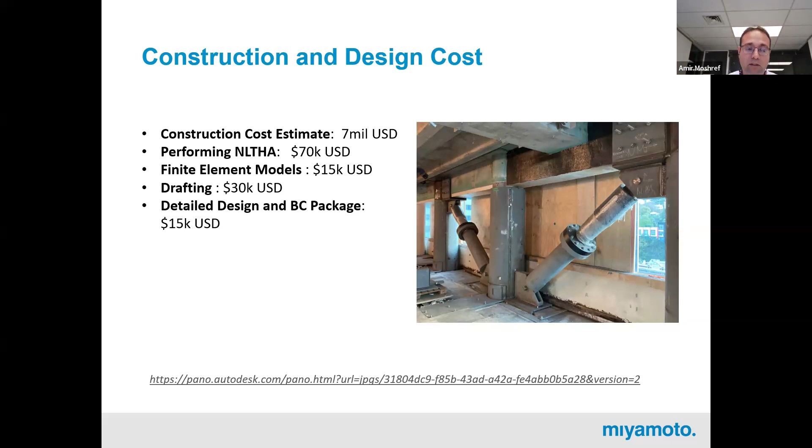So I want to summarize my presentation. If you look at what capability we have access to the lab, which is relatively cheap and quick. As Kit said, the most important thing when you go to the lab is first the cost, but also the time. If you go to the university lab here in New Zealand, they said they cannot do anything for at least a year. They put you on a waiting list and can do your test in a year's time, at least. That would kill the whole project.

So that's very beneficial to us. Then we have access to numerical modeling, we have the capability of doing that kind of stuff. And also we have those macros and coding developed here to easily convert ETABS to Abaqus and do the soil-structure interaction, which gives us a benefit as well. So that's a very good tool that we have.

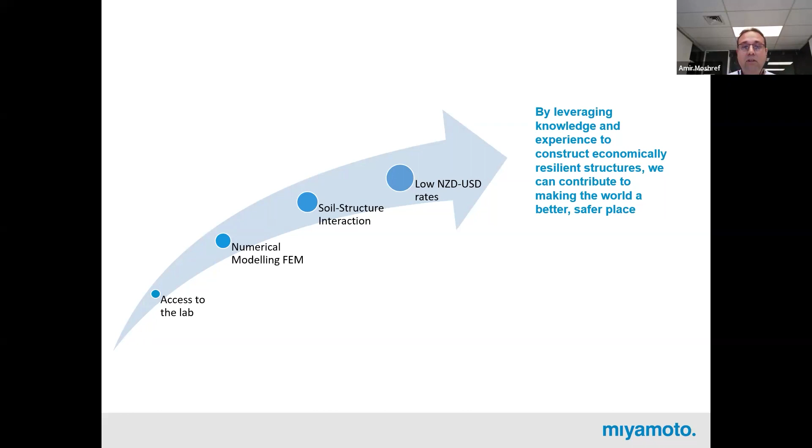But if you look at the bigger picture from a US perspective, we are very low in terms of the currency rate in New Zealand compared to US. So imagine if you use that capability for the US market, that would be very beneficial. So if we leverage all this knowledge and experience, we can propose an economically viable solution, and we make the building resilient. If we can do that kind of stuff, we actually reach our goal, which is to contribute to making the world a better and safer place.